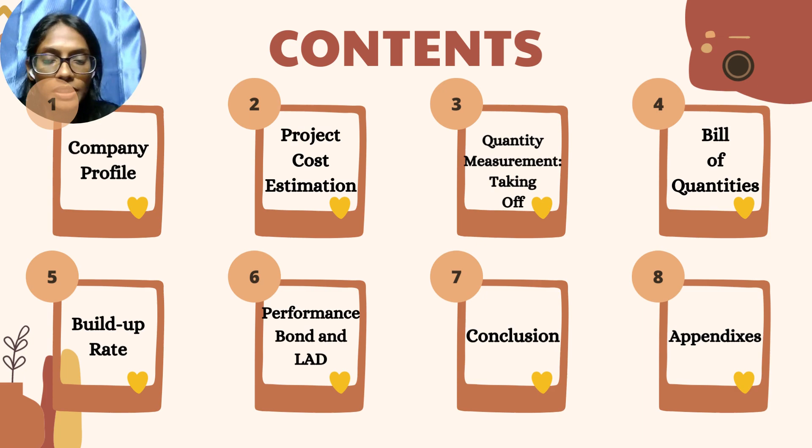The contents that we are going to present today are company profile, project cost estimation, quantity measurements taking off, bill of quantities (BQ), build up rate, performance bond and liquidated and ascertained damages (LAD), conclusion, and also we'll be showing some appendices of our plan and drawings.

Firstly, company profile. I'll explain the background of the company. Inta Bina is a reputable contractor for residential, commercial, industrial, and leisure properties.

We have completed more than 110 projects in Malaysia over 25 years of operating history. We have been able to complete building construction and civil engineering construction projects of any size thanks to our CIDB registrations being upgraded to a grade of G7 over time, which is the highest grade for the registration issued.

In addition, our dedication to our work has been evidenced by the fact that many of our projects over the past 10 years have received scores of 80% or higher on the CONQUAS and QLASSIC assessments.

Our group has sought to expand our portfolio into additional new projects, particularly in the affordable housing segment, which is rapidly gaining traction in the Malaysian market, in line with our business objectives of maintaining sustainable growth and creating long-term shareholder value.

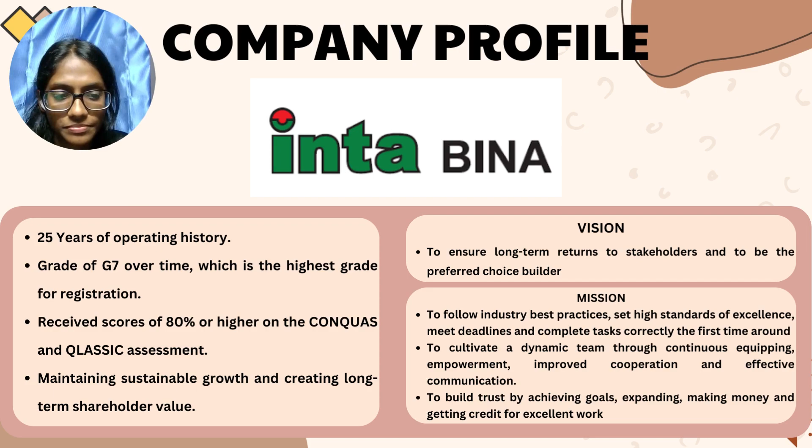Next, the organization chart of the company. Project director will be Theebashini, anak perempuan Rajeswaran. Project manager will be Risyaanth, anak lelaki Ila Murugan. The structural engineer will be Nur Shahida Shahmi binti Hazlan. Quantity surveyor is Siti Khadijah binti Awang. And the architect will be Nurul Illyanie binti Muhammad Anuar.

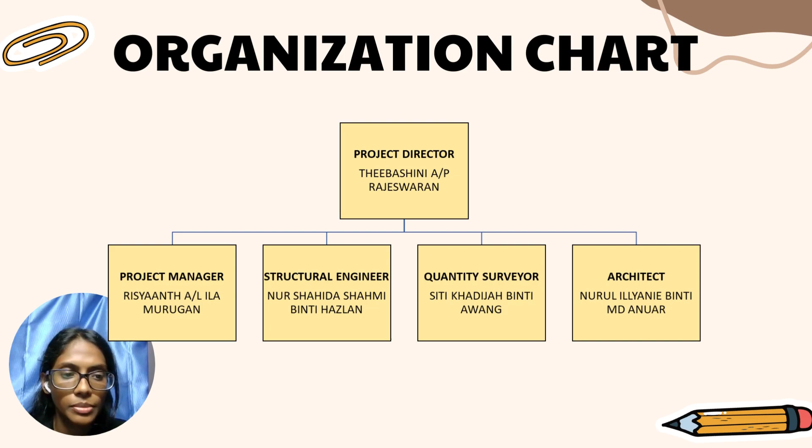Project cost estimation. In this project, we used brick wall with a thickness of 150 mm with 20 mm thick plaster, which makes the wall thickness 170 mm. Price rate cost per square meter will be 1,550 ringgit per meter square, and cost per unit volume will be 950 ringgit per meter cube.

For this building, we are using a pitch roof, and the equation of the pitch roof is C plus B plus A over 2, which gives us 4.68 meters of the dimension.

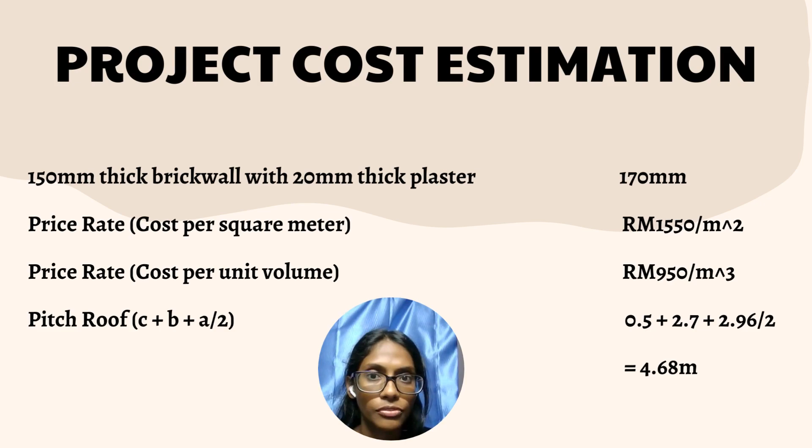Next, floor area method and building volume method are the preliminary methods for project cost estimation. The area of the building can be found by multiplying the length and width of the building, which results in 221.423 meter square, and the total cost will be 343,205 ringgit 65 cents.

Next, building volume method. The volume of the building we can get by multiplying length, width, and height of the building, which results in 1,086.859 meter cube. And the total cost will be 1,032,516 ringgit and 5 cents.

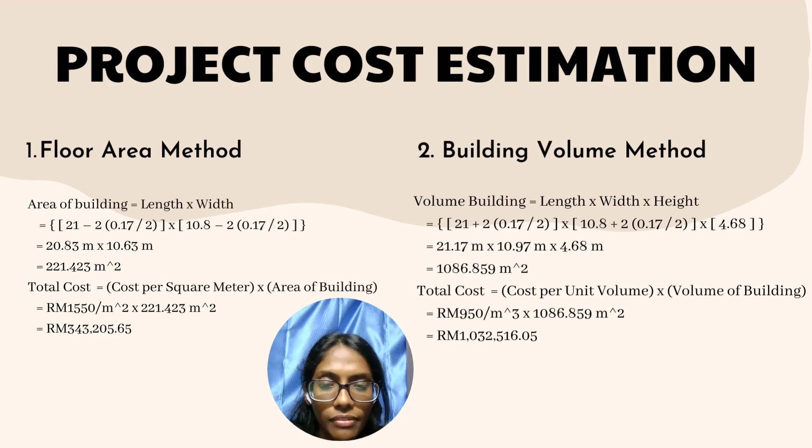Hello everyone, today I'll be talking about quantity measurement and taking off. Quantity measurement is important to know the amount of material that has been used, such as for formwork, rebar, and all those, and also the workload, such as for excavation and concreting.

As for the excavation for top soil, the area we get is 380.25 meter square, and the volume is 38.03. As for the excavation for reduced level, it is 68.45 meter cube, and excavation for pad footing is 1.014 meter cube.

As for the reduced level, it will be higher compared to the pad footing because we have already cleared a very huge area, and the pad footing will lie below the reduced level. Therefore, the excavation for pad footing is always lower compared to reduced level.

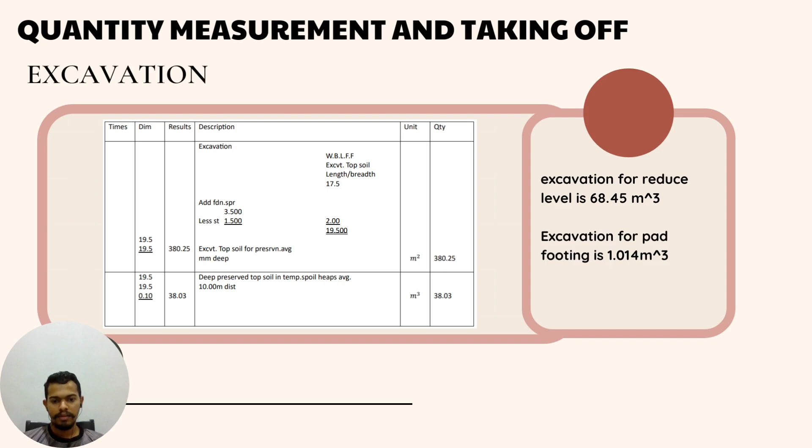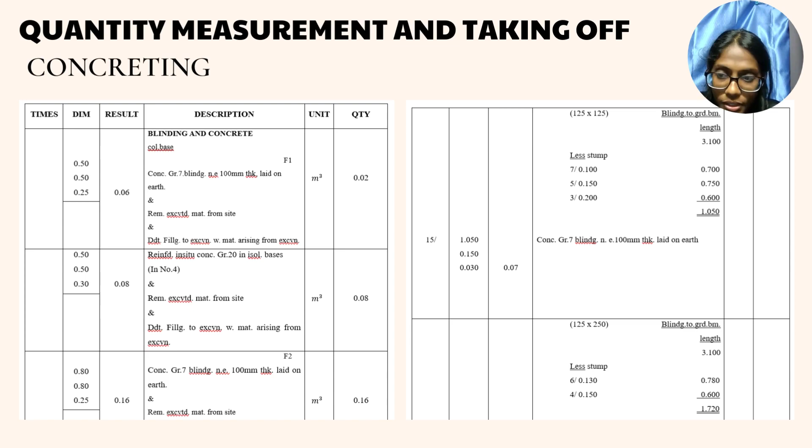Next, for concreting: blinding concrete is a thin concrete pour, usually of a lower strength grade, which is laid as a basement preparation beneath pavements and also footings. The purpose of blinding concrete is to provide a smooth, level base for reinforcement to be checked upon, and also to prevent concrete seepage into the support soil, or water being soaked up by the soil and extracted from the concrete mix.

The blinding concrete also can increase the founding depth, and in some cases therefore ensure that the line of influence from the footing lies below the potential nearby water pipe.

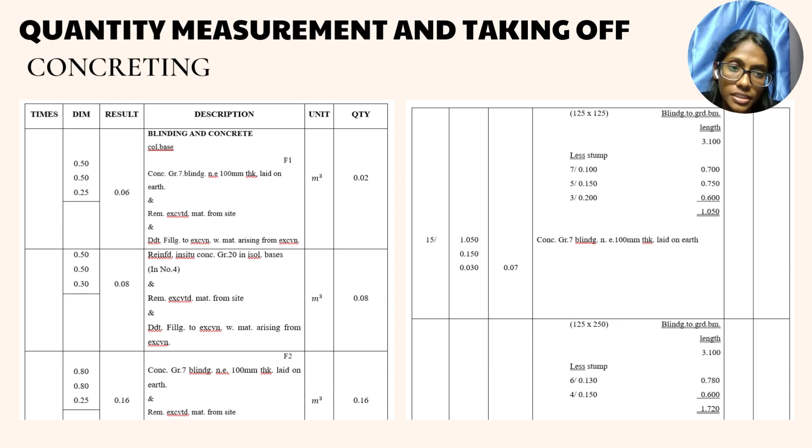Then, for the unit measurements, it depends on what we are using. It can be either in square meter or cubic meter. In this case, in our project, we are using cubic meter as the unit measurement.

Excavation trench for beam has more calculation compared to other excavation because we have three different types of beam in our drawing: the bigger beam in the outer layer, each area for the house is separated by medium beams, and the rooms wall is separated by smaller beams. Therefore, we have three beam calculations.

And then we have calculation for formwork, as we find the formwork for pad footing, column stump, and the beam. And finally, we have calculation for hardcore and DPM, as we put the membrane layer below the foundation level to prevent termite or water absorption to the pad footing.

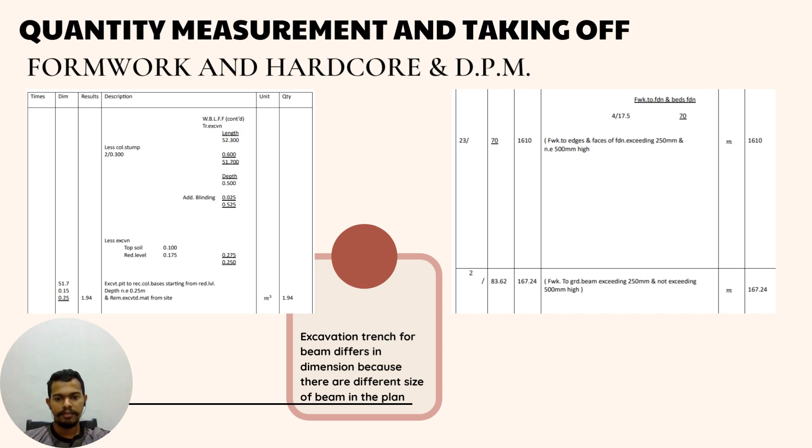First, for the pad footing, we need 118 meter bar in size 20. For the stump, we need 134.5 meter bar in size 20. Next, for the length of column, we need 44.352 meter bar in size 12. Next, for the column stump length, we need 60.102 meter bar in size 12.

Next, for the beam, we need 23.8 meter bar in size 20. And for tie wraps, we need 417.8 meter bar in size 8.

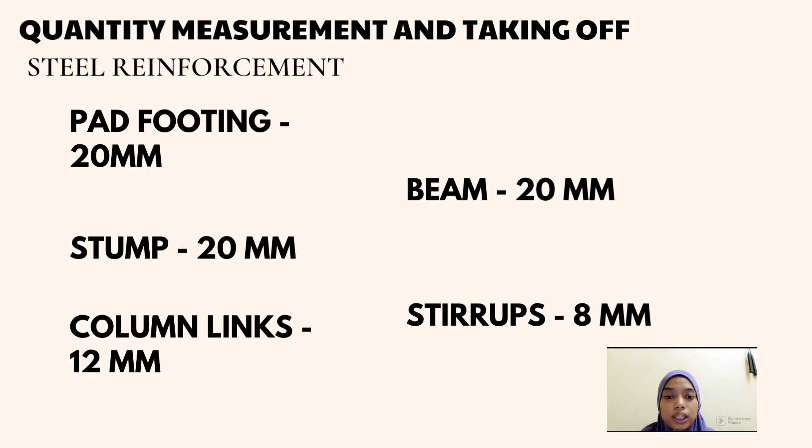Next, for the bills of quantities, for the excavations: for the excavation of the preserved topsoils, for spoil heaps at an average of 10 meter distance, we need 703 ringgit. For the excavation to reduced level, maximum depth not exceeding 1 meter, we need 9 ringgit and 71 cent. And for exceeding 1 meter, we need 616 ringgit and 50 cent. And for the removal of excavated materials from site, we need 5,612 ringgit and 90 cent.

Next, for the excavation of pit to reinforce concrete column base starting from reduced level, maximum depth not exceeding 1 meter, we need 9 ringgit and 71 cent. For depth exceeding 1 meter, we need 12 cent. And for the pit excavation for excavating in rock, we need 2 ringgit and 30 cent.

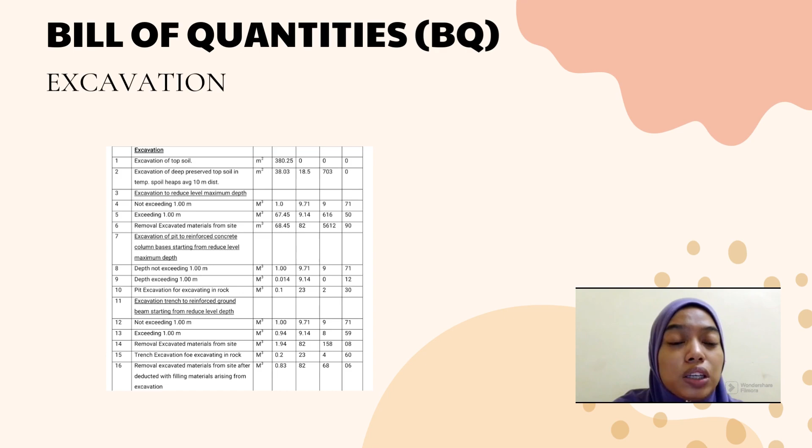Next, for the excavations of trench to reinforce ground beam starting from reduced level depth, for not exceeding 1 meter, we need 9 ringgit and 71 cent. For exceeding 1 meter, we need 8 ringgit and 59 cent. For the removal of excavated materials from site, we need 158 ringgit and 8 cent. And for the trench excavations for excavating in rock, we need 4 ringgit and 60 cent. And for removal of excavated materials from site after deducting filling material arising from excavations, we need 68 ringgit and 6 cent.

Bills of quantities for blinding and concrete: for the concrete grade 7 blinding, 100mm thick laid on earth, we need 3,744 ringgit and 82 cent. And for the reinforced in-situ concrete grade 20, we need 6,115 ringgit and 49 cents.

And for the reinforced in-situ concrete grade 25 in column stump 1, we need 3,337 ringgit and 86 cents. And for reinforced in-situ concrete grade 25 in column stump 2, we need 11,571 ringgit and 42 cents.

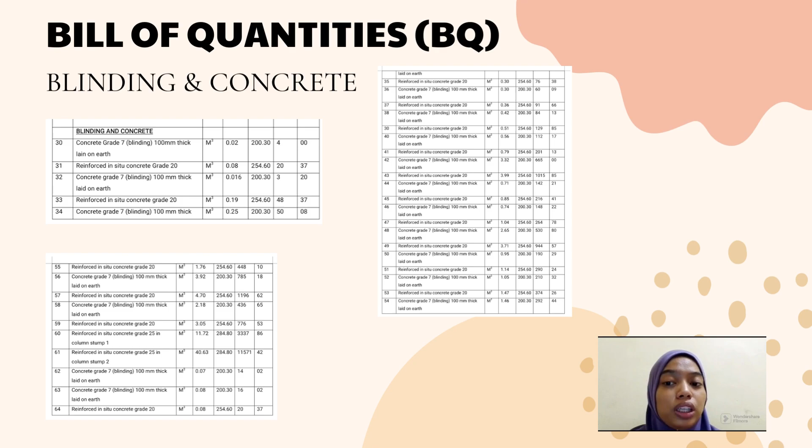Bills of quantities for formwork. For formwork to edge and face of foundations exceeding 250 mm and not exceeding 500 mm height, we need 18,917 ringgit and 50 cent.

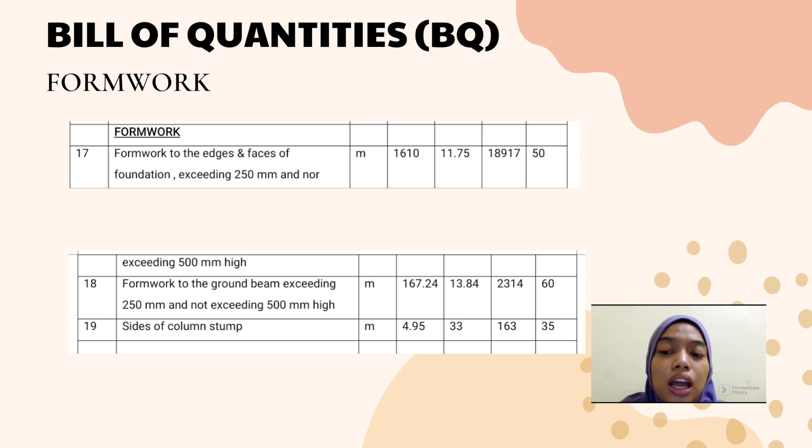For the formwork to the ground beam exceeding 250 mm and not exceeding 500 mm height, we need 2,314 ringgit and 60 cent. And for the sides of column stump, we need 163 ringgit and 35 cent.

For the bills of quantities of the steel reinforcement, for 20 mm bar in foundations, we need 90 ringgit and 16 cent. For 25 mm bars in column stump, we need 165 ringgit and 10 cent.

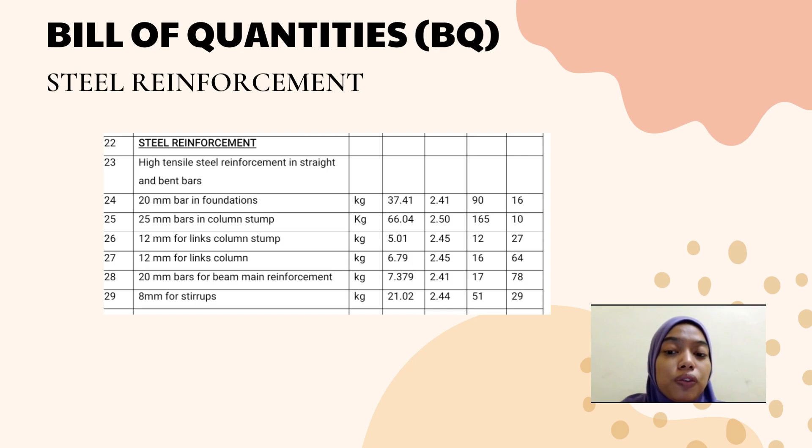For 12 mm for links column stump, we need 12 ringgit and 27 cent. For 12 mm for links column, we need 16 ringgit and 64 cent. For 20 mm bars for beam main reinforcement, we need 17 ringgit and 78 cent. And lastly, for 8 mm for stirrups, we need 51 ringgit and 29 cent.

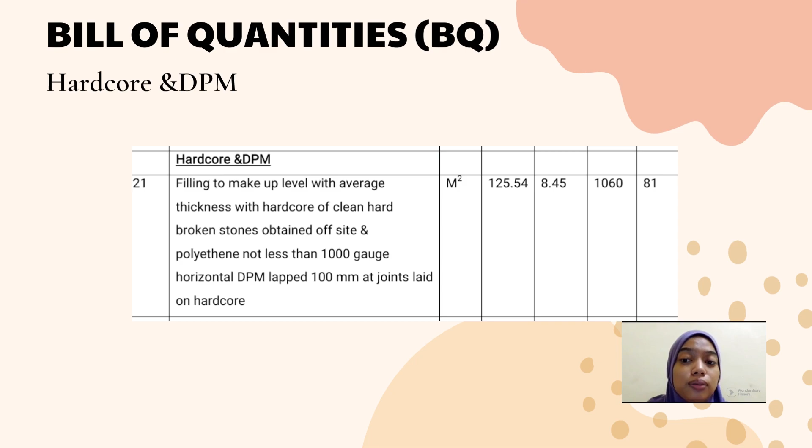Of quantity for hardcore and DPM. For the filling to make up level with average thickness with hardcore of clean hard broken stones obtained off site, and polyethylene not less than 1000 gauge horizontal DPM lap 100 mm at joints laid on hardcore, we need 1,060 ringgit and 81 cent.

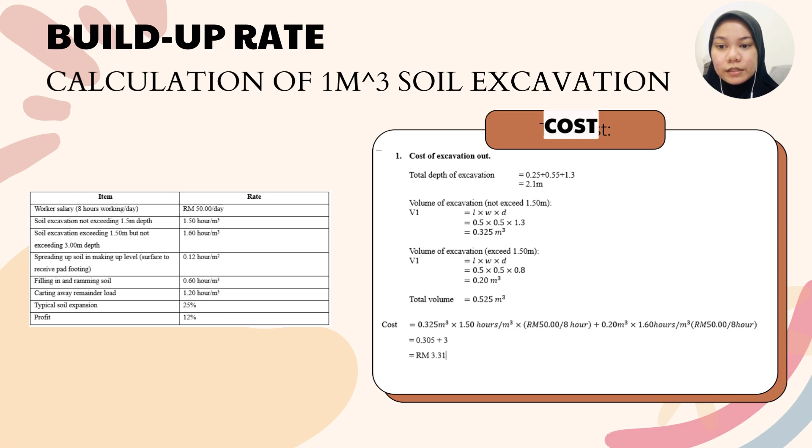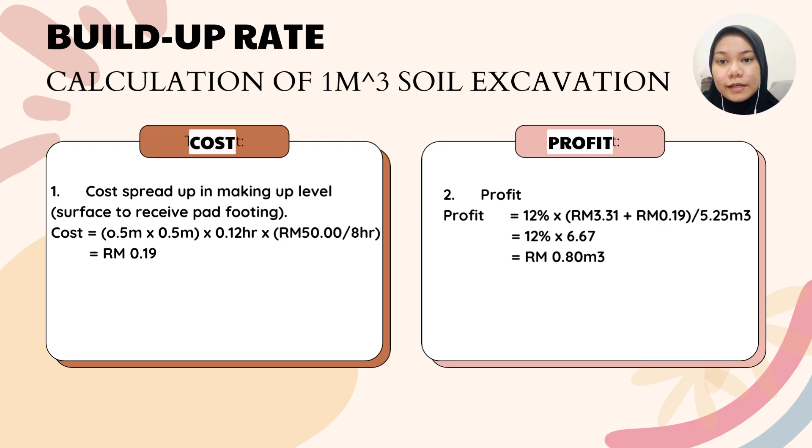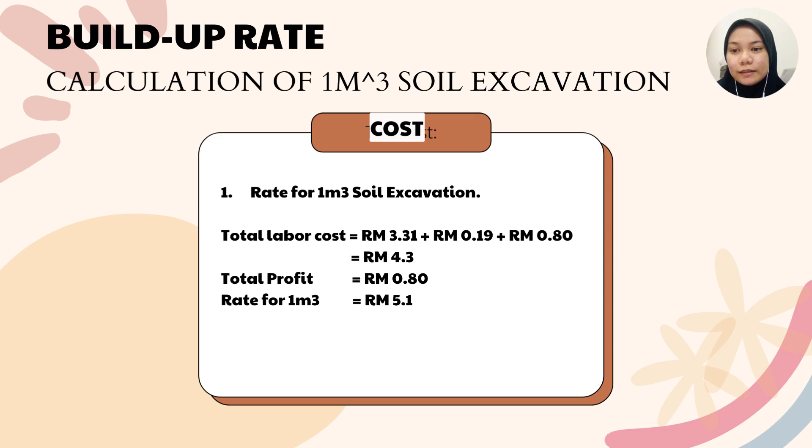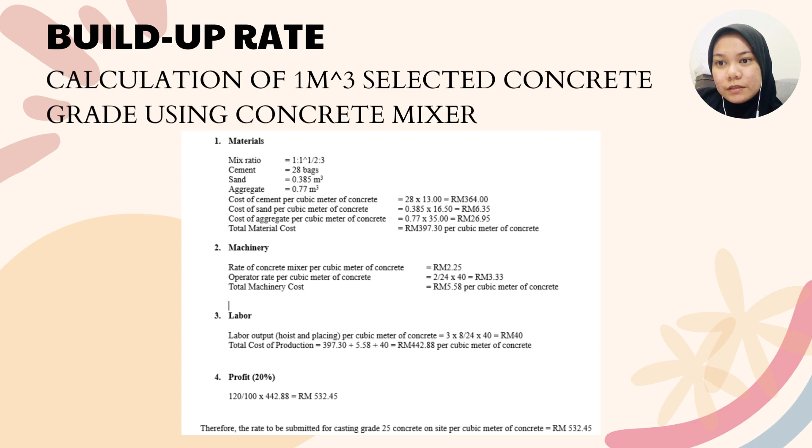Next, we do the calculation of 1 meter cube selected concrete grade using concrete mixer. Here is the calculation for concrete grade by using concrete mixer. First, material; second, machinery; third, labor; and last, profit.

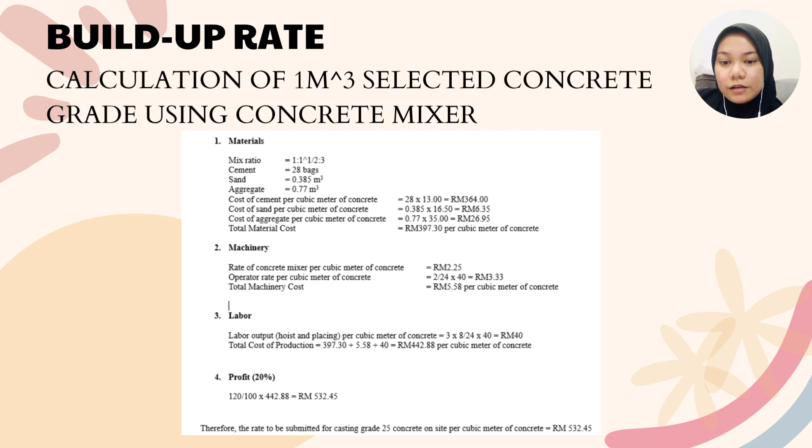Therefore, the rate to be submitted for casting grade 25 concrete on the site per cubic meter of concrete is RM 532 ringgit and 45 cent.

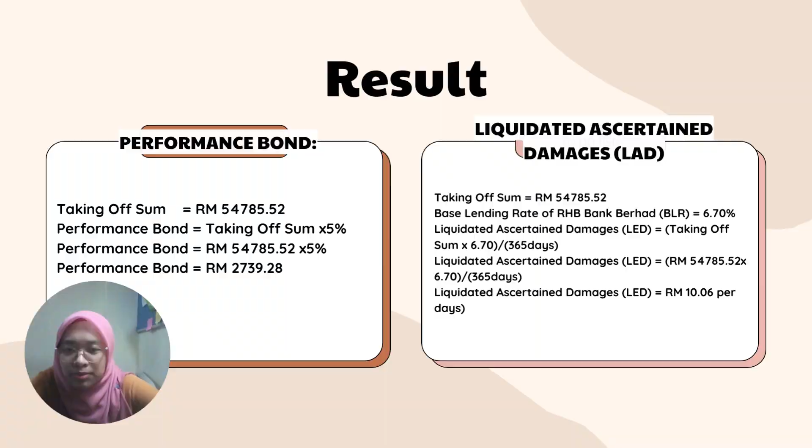So, as for conclusion, all in all, we learn about the contract and how it relates to the project's cost estimate from this project.

The floor area method and the volume method are the two preliminary estimating methods used to calculate the construction project cost estimate. It demonstrates that this method is more likely to be utilized early on in the construction project to forecast potential costs.

We can determine the cost of excavation, filling, ramming the soil, carting away the remainder load, and spreading up soil in making up level using the build-up rate calculation.

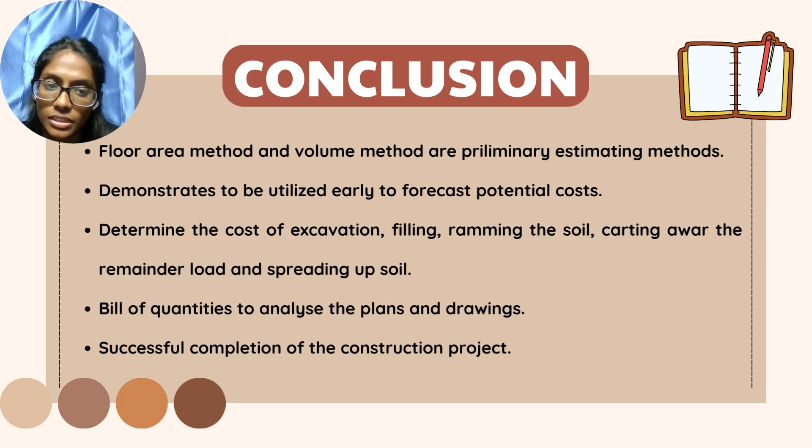After that, taking off is calculated to generate a bill of quantities that can be used to analyze the plans and the drawings to estimate future construction costs. These tasks are crucial to the successful completion of the construction project.